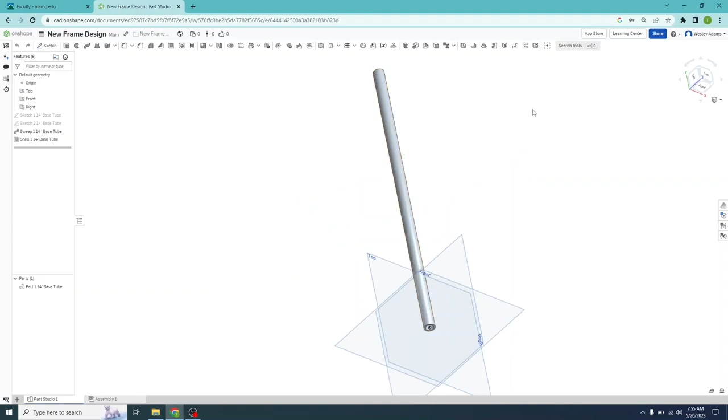Even though we'll need two of these, we're only going to create one, because if we change the dimensions of this one, we'd have to change the second to match. So it only makes sense to create one 7.5-inch tube, and we're going to turn this other part off.

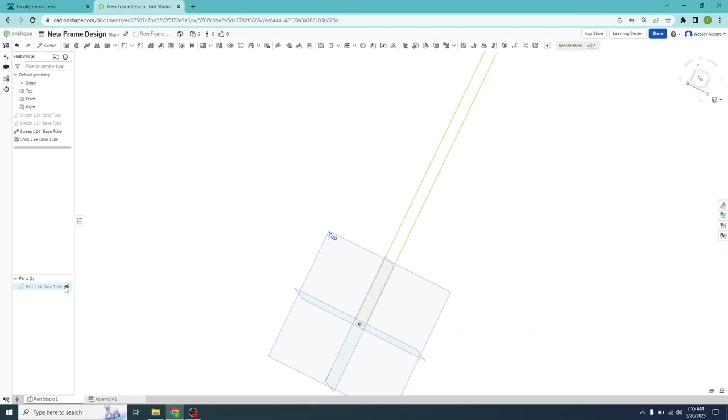Notice this little eyeball icon—if you left click on that, it turns the part off. We don't need to see it; it would be distracting if we're trying to build parts right on top of it. So we'll go to the top view and keep these parts oriented the same direction, turning that part off so we don't have to look at it.

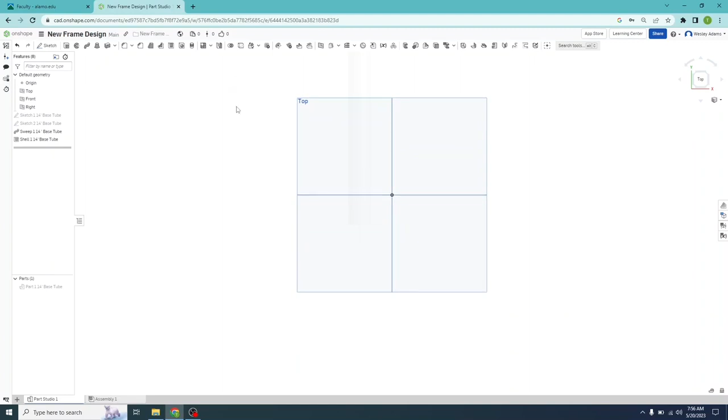I'll take the mouse wheel, press it, and drag that top view up. We had the last one in front view to make the circle, so we'll do that again, turning this one back off. We'll keep those going in the same direction—it doesn't matter, but it keeps things organized.

We're going to go up to Sketch Tool and click on the plane we want to work in—the front plane, you notice it right here. Now it's listed, and you see that sketch rectangle show up.

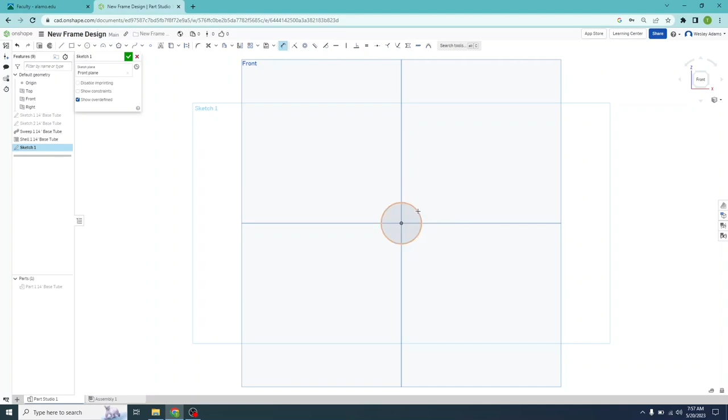We're going to go up to Center Point Circle, click on that, drag it out, then hit Escape so we don't create another circle. Then go to the dimension tool, select it, and left click on the outer part of the circle, drag that out, and we want this to be 0.5, so a half inch in diameter for the tube.

Same process we used last time. Now we're going to go back to isometric view so you can see that circle, and I believe we extruded this out in the right plane.

I'll turn the old one on—yes, so we need to be in the right plane to do that, and I'll show you what I mean. If I turn the old part off, notice that the line we created to make the tube, when we swept it, was in the right plane. So, alright, now turn that off.

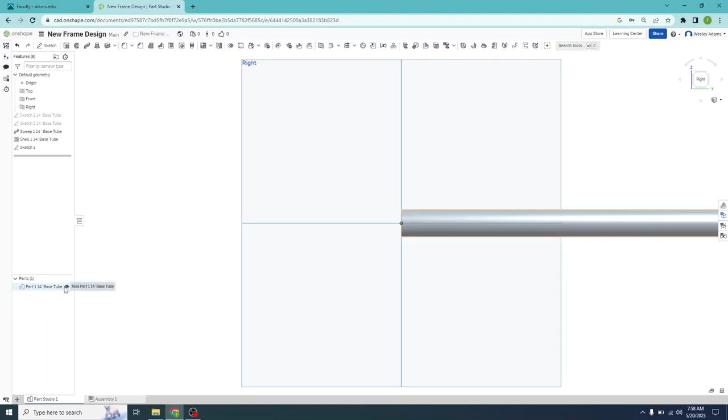We can use those older parts to orient ourselves and make sure everything's going in the same direction. Now we're going to create that second sketch just like we did before—and again, I'll rename these at the end of the video.

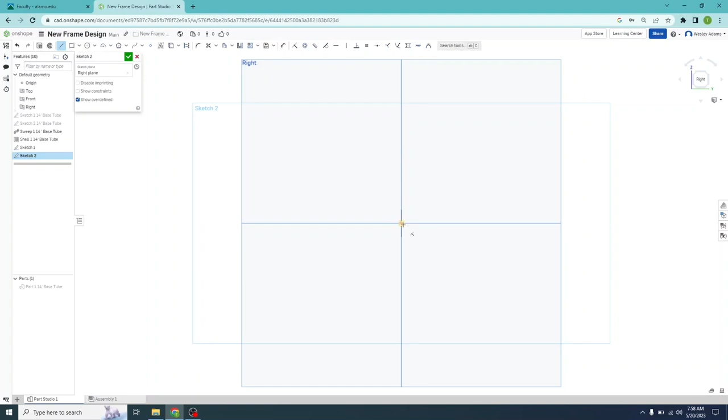So we're creating a new sketch. It's asking which plane—we want to be in the right plane. We'll go up to this line tool, bring the cursor over the center point of the right plane, left click and drag that out. It doesn't matter how long it is right now. Left click again.

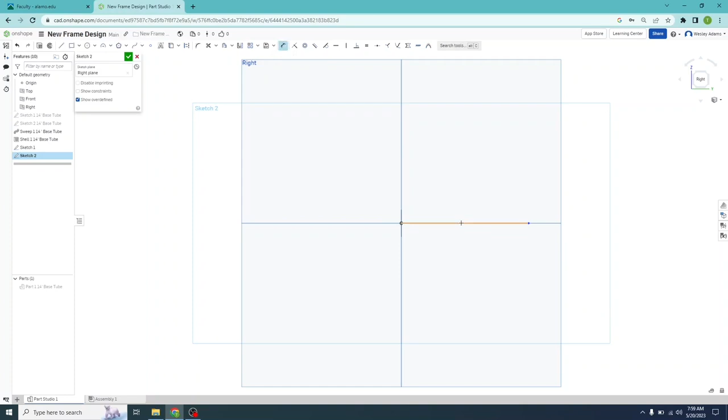Now it's going to try to create that other additional line, so we hit Escape, and that'll turn that feature off. Now we're going to go back up to the dimension tool. We're going to left click on that line, drag that out, and we want this one to be 7.5 inches long. Alright, great. So now let's turn our sketch feature off.

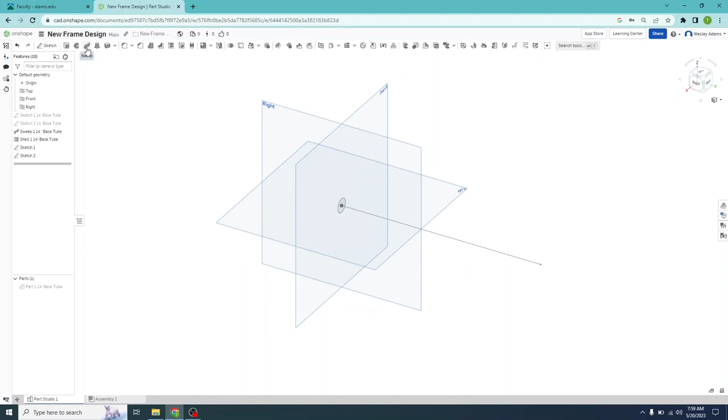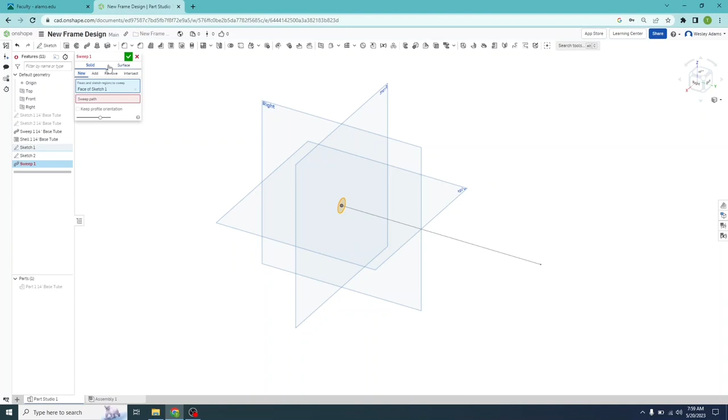Let's go back up here to isometric view so that we can see both. And we're going to go and sweep that path to create the outer surface of the tube. Make sure that solid is on, that new, and now it's asking us the faces to sweep. So we're going to go down here and left click on the outer part of that circle. That's going to be the face, and now it needs the path, which is the line we just drew. We're going to click on that until it turns blue, and then come down here and left click on the line.

Now we've created another part, but it's not hollow. Let's go ahead and close the swept path out.

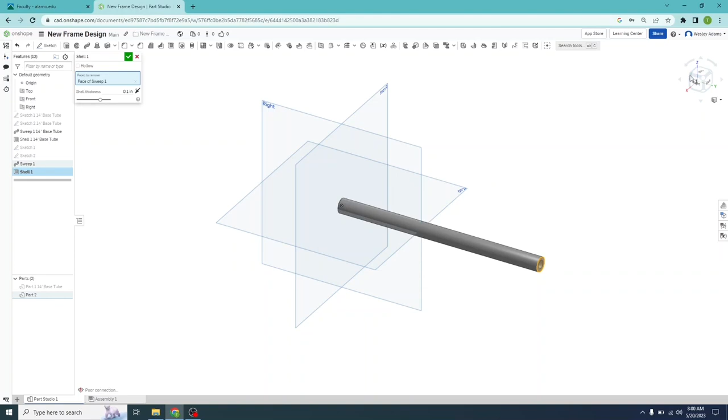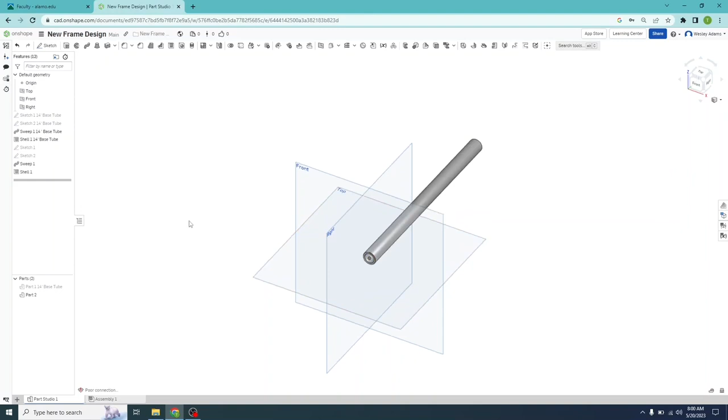Let's go up here to the shell. We're going to click on that, left click, come down, and now we're going to select the end of that pipe here. Alright, and before we close that out, we're going to go to the other side, so other isometric view. I just clicked on that square. And we want that to be 0.0625, 1/16 of an inch thick. Not that it'll matter, but again it gives us practice. So if we ever need something to fit inside that tube, we'll have it set up.

But let's right click on that and let's go down to Edit Appearance. Let's change that to silver so that these tubes will look like they're aluminum, and just to give us practice.

And I'm going to change this, so I'm going to go to Rename, left click on the inside of that, and this is going to be 7.5 inches. So I got that one right. Base tube. And this is just to keep everything organized, so if we need to go back in and change dimensions, we can quickly look at that list of sketches and sweeps that we're creating in the features.

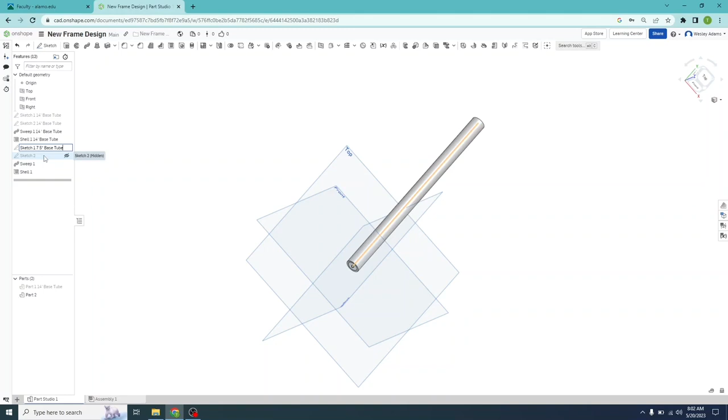That's what they're defined as features, and quickly edit and find the elements of that part we need to change in the features. So right now we have 12.

Transform feature. So we're going to select this part here, and let's go up and find transform right here. Then what I'm going to do is, it's selected part 2, that's the one we want to move. And we're going to move this by X, Y, and Z so that we can just drag it.

You'll notice these 2 arrows pop up. We're in top view right now, and that's why you only see 2 arrows, because we're only moving it in the XY plane. Now if we were in isometric view, you'll notice that we have 3 arrows, so we'll get X, Y, and Z. We have X here, Y here, and Z here, and you'll notice that corresponds to what's in the cube.

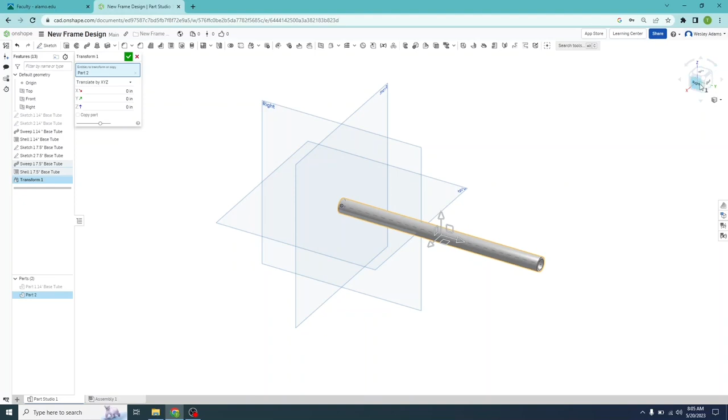But often if you're just moving it from one side to the next, it's easier just to keep it in one plane. And I'm just going to drag that over so that if we do turn these on at the same time, we can see the difference between the 2. Alright, so I'm going to check that transform, and now we can turn both parts on.

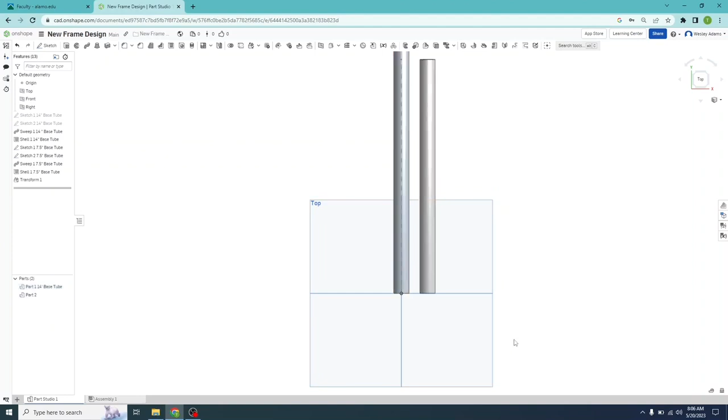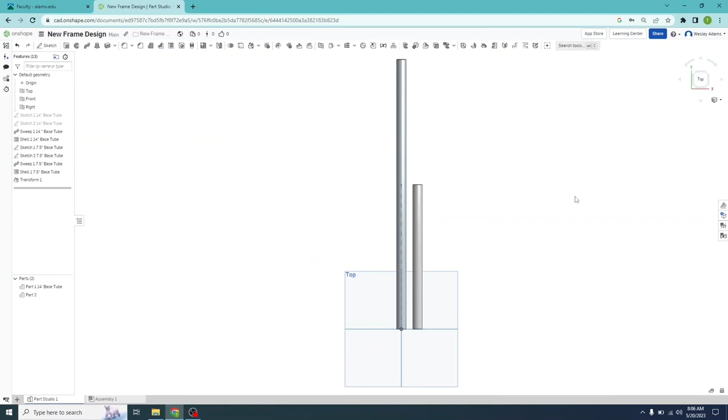I'm going to scroll out, and that's all we're going to do for this video. So there I'm pressing the right trigger button. Now I'm going to press the center of the wheel, or the center wheel. Let's go back to top view. We'll leave it oriented like that, and we'll turn both of these off and get repetition with that next video.